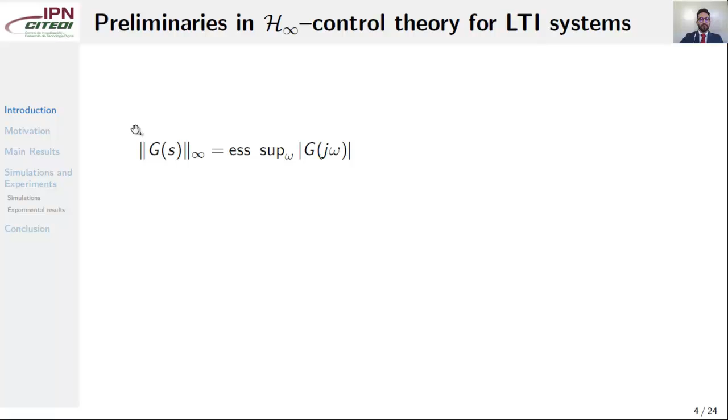Let us start with the introduction. Some preliminaries in H-infinity control theory for linear time-invariant systems are given. Here we have the H-infinity norm of a transfer function g.

For instance, consider a second-order system defined as we can see here, where W is the natural frequency and zeta is the damping ratio. S is the complex variable.

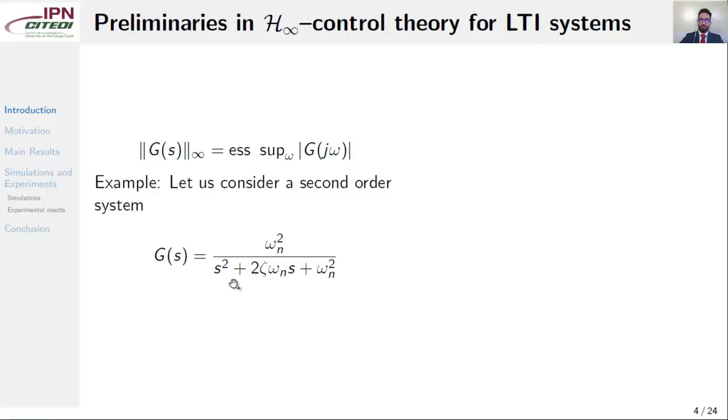A Bode diagram of this transfer function g is given in this figure for Wn equals 1 radian per second and zeta equals 0.15. In this axis we have the frequency in radians per second, and in this axis we have the magnitude of g. If you see here, for 1 radian per second the magnitude of g reaches its maximum value, so this value is the H-infinity norm of g.

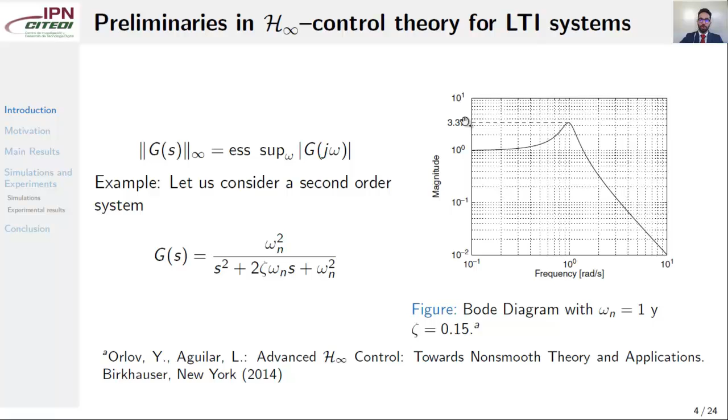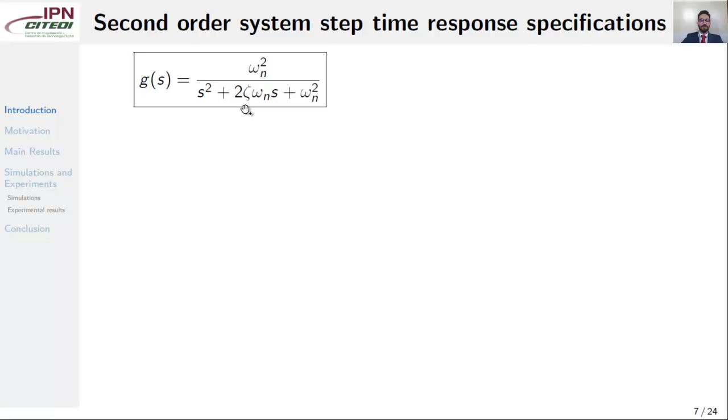We continue with the second-order system step-time response specifications. Consider once more the transfer function g, defined by the natural frequency Wn and the damping ratio zeta. Here we show the step-time response of a second-order linear system.

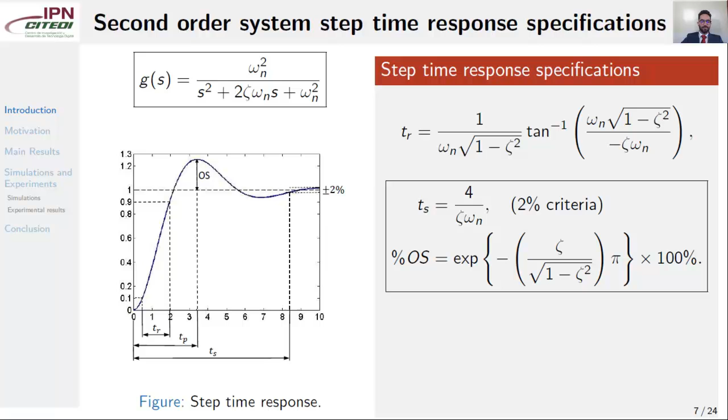The step-time response specifications are the rise time, which is the time required for the waveform to go from 0.1 of the final value to 0.9 of the final value; the settling time, which is the time required for the transient damped oscillation to reach and stay within a band of plus minus 2%; and finally, the percent overshoot, which is the amount that the waveform overshoots the steady state or final value at the peak time, expressed as a percentage of the steady state value.

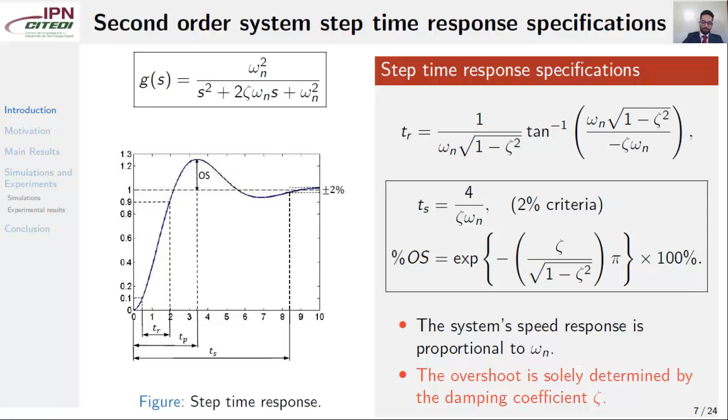Notice that the system's speed response is proportional to the natural frequency, and the overshoot is solely determined by the damping coefficient zeta. Now I would like to introduce our motivation to develop this research.

Consider, for example, a process having a critical time response, a coal-fired unit that demands strict time response specifications. In particular, I will concentrate my efforts here on the boiler.

High level in the boiler can lead to water bubbles passing through the system and impacting the turbine's paddles, with catastrophic consequences. Also, high pressure in the boiler could lead to explosion with respective damage to personnel.

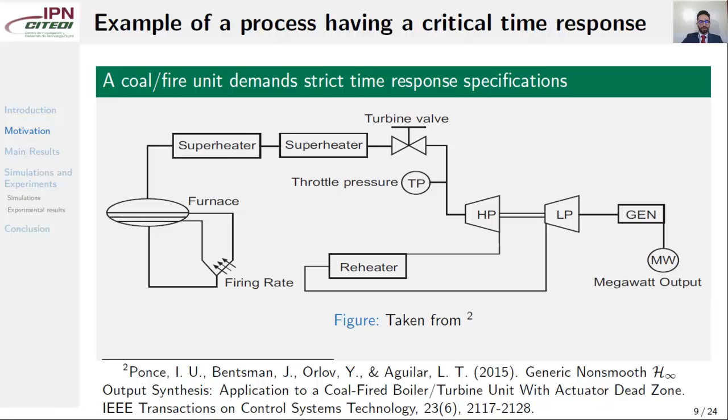Both variables are sensitive to step command inputs. That's why it's so important to properly design the controllers in order to achieve step time response specifications according to the safety rations of operation.

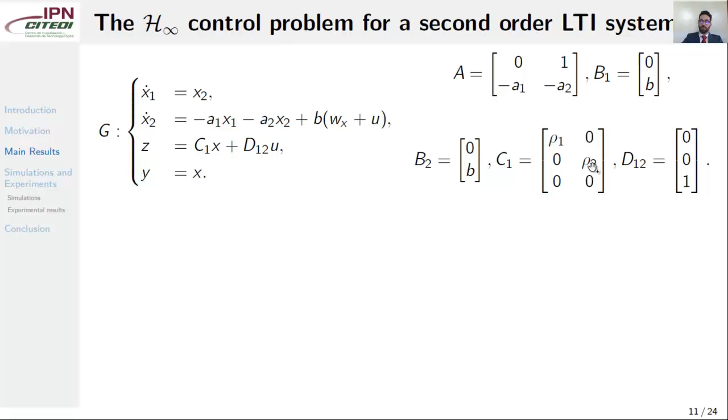What's the objective of our design? To find P epsilon such that it satisfies this algebraic equation, and also that the closed loop system with U equals minus B2 transpose P epsilon x guarantees a desired settling time and percent overshoot.

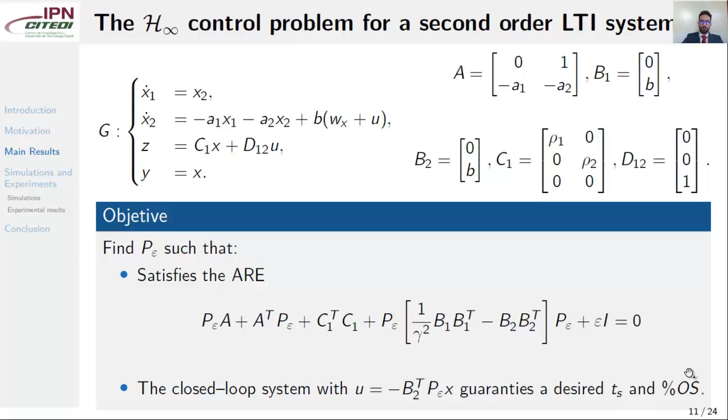To this end, let us consider P epsilon as a 2 by 2 square matrix, positive definite, with entries P11, P22, and P. The unperturbed closed-loop system has a characteristic polynomial equation as shown in (1). Notice here the 2 entries of the matrix P epsilon.

Now we want to establish some settling time and percent overshoot required for the system to function properly. From these values we get the desired natural frequency and desired damping ratio. If we consider, with these parameters, a desired characteristic polynomial equation as in (2), and match each coefficient of these two polynomials, we get the entries P22 and P of the P epsilon matrix.

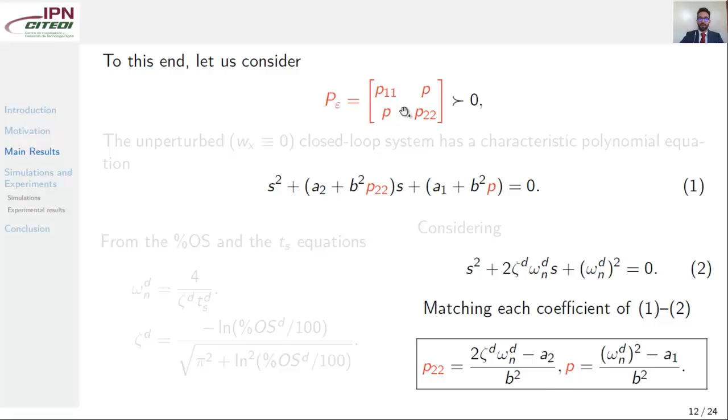So the first result appears: we have P22 and P, two of the entries of the matrix P epsilon. Of course, if we want P22 and P to be positive, these conditions here must be fulfilled.

From the algebraic Riccati equation, a set of algebraic equations arises, as shown here. From here we get rho 1, rho 2, P11, and gamma, the remaining parameters to complete the design.

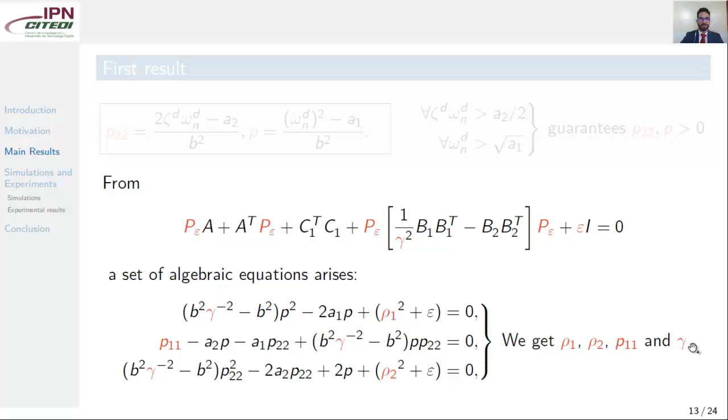The second result is clear now: we have rho 1, rho 2, and P11. Rho 2 and rho 1 are real values if gamma satisfies being greater than these two values here. And P11 is positive if gamma is also greater than this value.

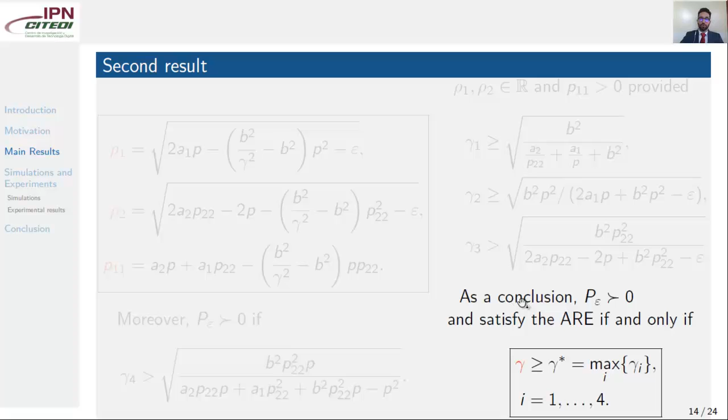Moreover, P epsilon is positive definite if gamma is greater than this value. As a conclusion, P epsilon is positive definite and satisfies the algebraic Riccati equation if and only if gamma is greater than the four values previously shown.

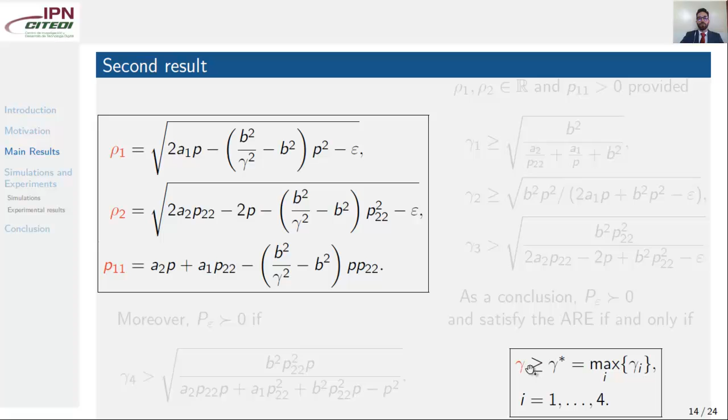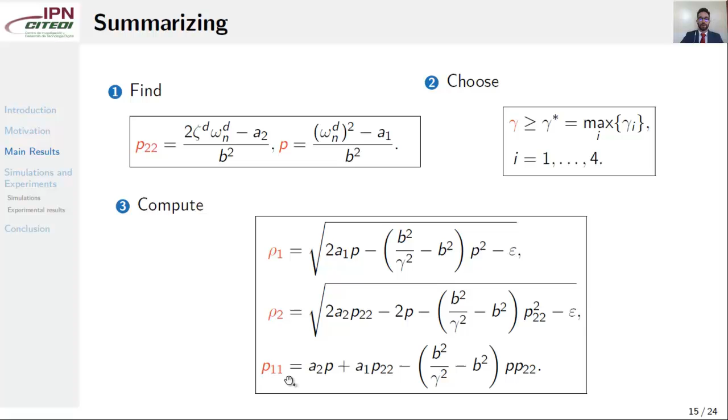So the second result is complete. We have the remaining design parameters completely selected. Summarizing, find P22 and P as shown here, and you will get the desired settling time and desired percent overshoot. Choose gamma greater than the value shown. Finally compute rho 1, rho 2, and P11, and the design is complete.

Simulations and experiments are shown next.

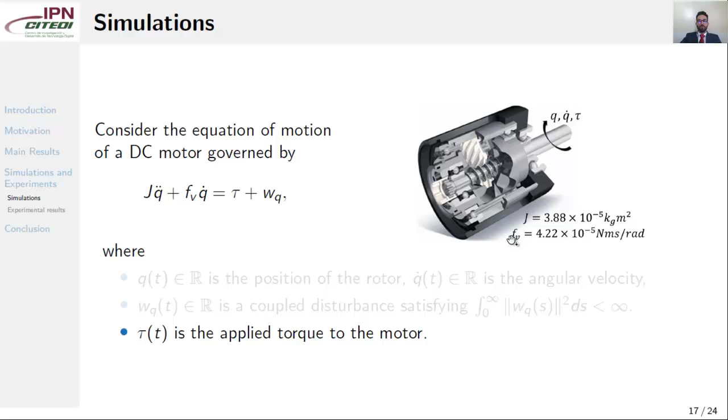Consider the equation of motion of a DC motor as here, where q is the position of the rotor, dot q is the angular velocity, wq is a coupled disturbance satisfying the bounded condition, and tau is the applied torque to the motor. Our motor has parameters like inertia and viscous friction coefficient as shown here. The control input tau is proposed as here, which yields this system.

Notice that we have here a second order linear time-invariant system in the presence of our control input U. Our system can be expressed then in the H infinity standard form with A, B1, B2, C1, and D12 as shown here. Notice that we have rho 1 and rho 2 as design parameters.

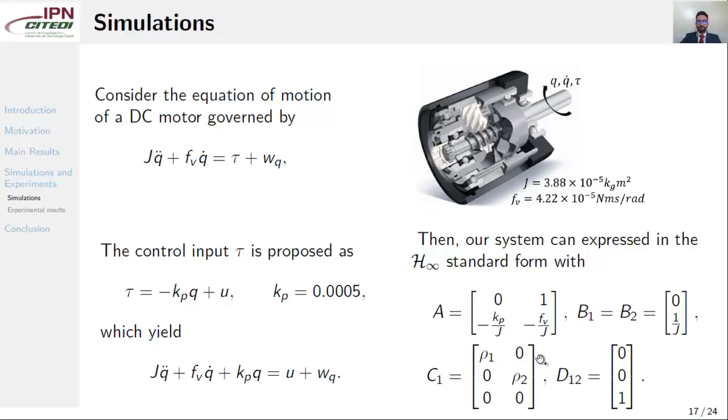In simulation 2, we change a little bit, deciding the specification of a step time response. We want 0.2 seconds of settling time and an overshoot of 2%. Applying the methodology, we get rho 1, rho 2, and gamma. Figure A shows the step time response. Here we have 0.2 seconds of settling time and a 2% overshoot. One more time, we achieved the desired specification of the step time response, and this is the control input required.

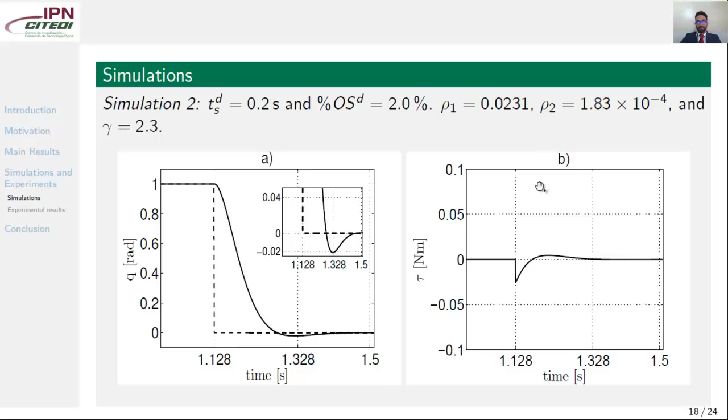We perform a third simulation with a settling time of 0.2 seconds and percent overshoot 2.0. Applying our method, you will get rho 1, rho 2, and gamma.

In the fourth simulation, we consider uncertainty on the parameters. So we took the inertia and the viscous friction coefficient and changed their values by 5% up and down, and that's what we can see here in all these colors. In the zooming area, we can see that no significant change is appreciated. Also, the control input has no significant change. So we achieve our goal.

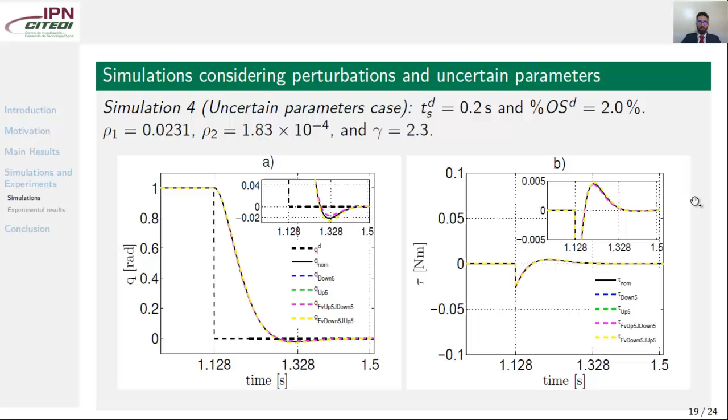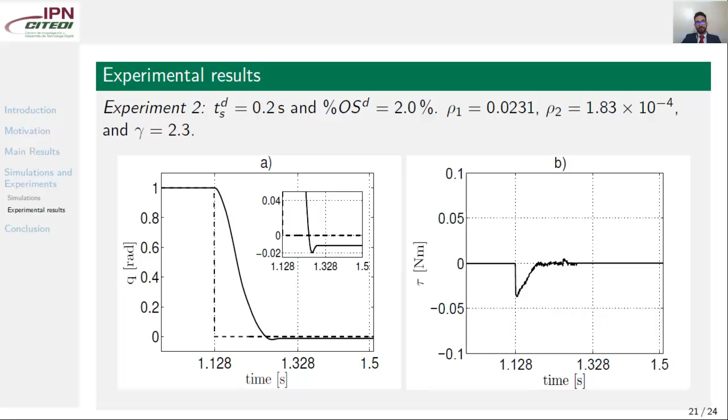For the second experiment, we tried to reproduce the results from the second simulation. So we also want a settling time of 0.2 seconds and percent overshoot of 2%. Applying the methodology, we get rho 1, rho 2, and gamma. Figure A shows the step time response, and figure B shows the control input. As we can see here in the second experiment and also in the first experiment, the results are not as accurate in comparison with the simulations. One justification is we are dealing with a real process where nonlinearities are present.

Finally, we would like to present some conclusions. We have presented formulas to tune a linear H-infinity controller to meet an L2-gain inequality constraint and to achieve the desired step time response specifications for second-order linear time-invariant systems. The simulations and experimental results corroborated the theoretical development.

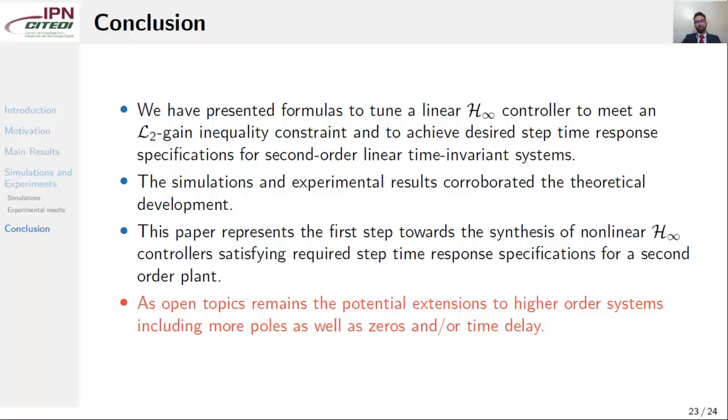This paper represents the first step towards the synthesis of nonlinear H-infinity controllers satisfying required step time response specifications for a second-order plant. Open topics remain the potential extension to higher-order systems, including more poles as well as zeros, and/or time delay.